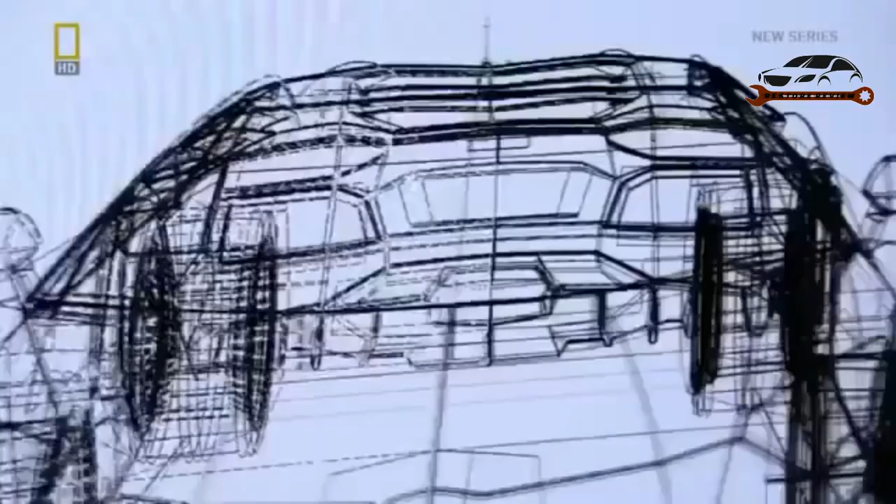Super sports car the world has ever seen. A game-changing vehicle that will alter the scope of supercar design for good. But this will be no simple reworking of Lamborghini's old flagship models. Its engineers and designers are given the task of starting with a completely clean slate.

And at its megafactory in northern Italy, the Lamborghini team has been stretched to its limits to fulfill those expectations. Now, as its latest creation takes to the road, it will be seen if the high-risk strategy has paid off.

Lamborghini has been responsible for some of the world's most iconic sports cars of the past half-century. 350 GT, Miura, Countach, Diablo. The brand has achieved global recognition for its no-holds-barred approach to automotive engineering. Its extreme and powerful machines have placed it among the supercar manufacturing elite for decades.

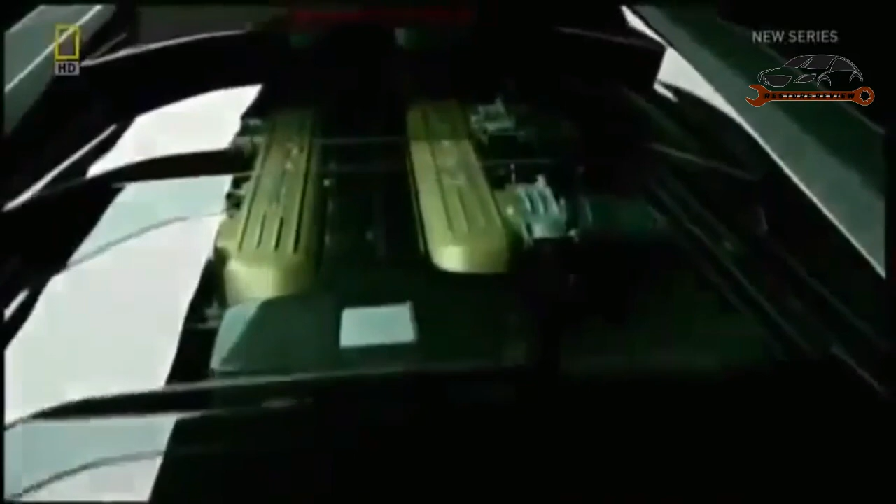But there's no room for complacency in this increasingly crowded marketplace. And a decade since the launch of their last flagship model, the Murcielago, it's time for Lamborghini to flex its muscles once again.

It's up to Stephan Winkelmann, the company's CEO, to come up with a bold approach. One of the toughest things was to give the right briefing, and it took us weeks and months, and once I went home and I was thinking about it, it's so easy, and it's just down to 2 words, so no competitors.

4 years of intense development follow, conducted in fiercely secretive conditions. Our factory was as closed as Fort Knox. We had to prevent anybody from coming in and taking any picture to avoid leakages. But finally, in March 2011, at the Geneva Motor Show, Lamborghini casts off the secrecy and unveils its latest model.

The Aventador LP700-4. Its launch has huge implications for the future of the company. For us, the Aventador was something which has to re-establish the leadership, to be a benchmark for a decade. So it has to be a jump of 2 generations, something really different from what has been there.

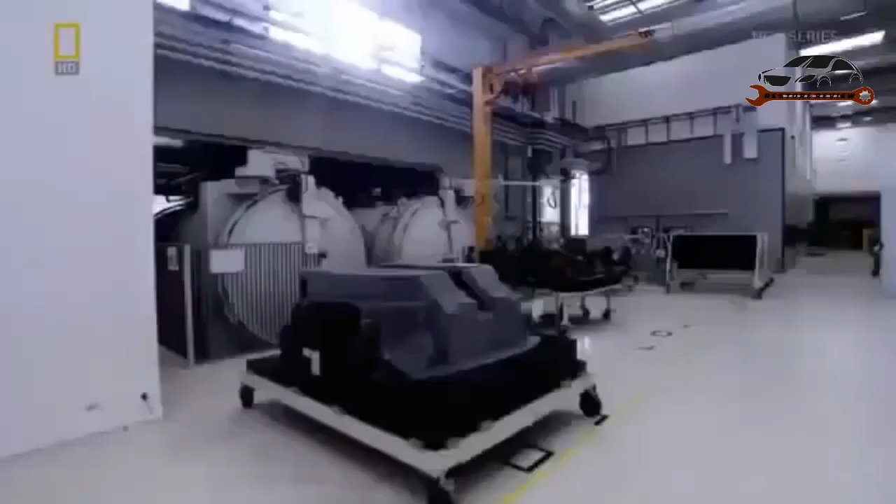Stephan Winkelmann has laid out his vision in a manifesto for the future of the supercar. Nowadays, it's much more important to speak about the power-to-weight ratio, so the balance between the power of the car and the weight of the car. And for us in the future it's much more important to reduce the weight because you get a better feeling, a better driving experience. The Aventador is the first test of this new blueprint.

And the National Geographic Channel has been given unique access at the Lamborghini factory to witness the creation of some of the car's first incarnations. This is Sant'Agata Bolognese, a typically picturesque town in the heart of Italy's Emilia-Romagna district. But it is in fact anything but typical, as it's home to Lamborghini, one of the world's most renowned supercar manufacturers.

The factory is situated in the heart of what is known as Motor Valley in northern Italy. Sant'Agata is intrinsically linked to Lamborghini's success, according to its head of communications, Raffaello Porro. Everybody in the world recognizes our cars come from Sant'Agata Bolognese. And so our factory is a kind of temple where people come, you can say a pilgrimage, to visit where those cars come from.

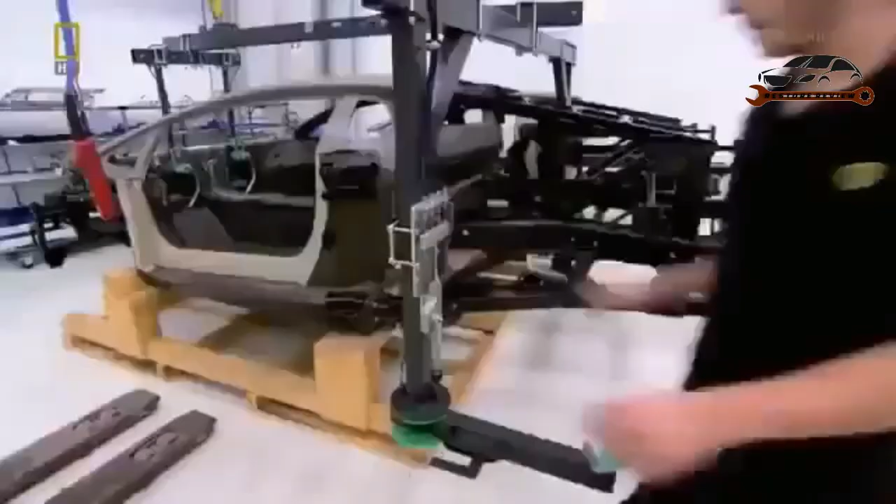The factory has seen many changes over the years, but its purpose has never wavered, to produce vehicles that challenge the status quo. And a largely local workforce is a vital part of that ethos. They're coming from this region, not even from the region, they're coming from this part of Emilia. You know, we are in Emilia-Romagna, it's the Motor Valley, and this is in Emilia.

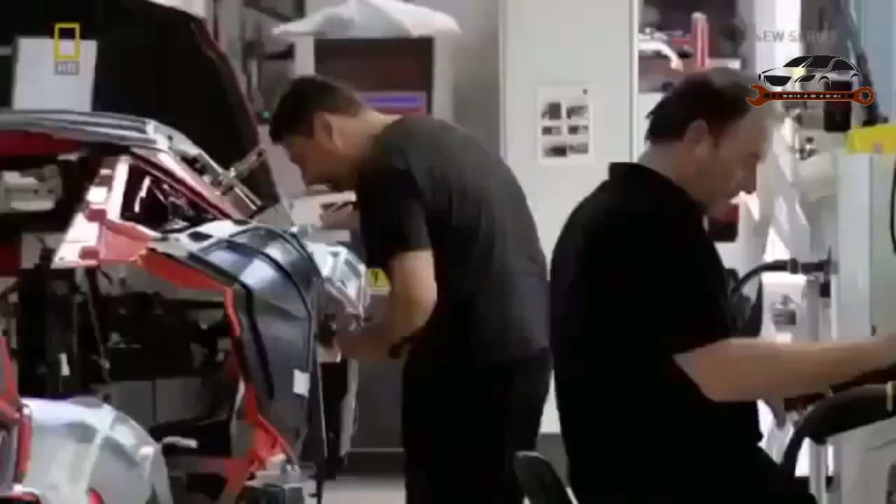So a lot of our people are not only living here, they were born here, they are here since generations, and a lot of workers we have in our factory, in our plant, are here at the second generation. These people are Lamborghini's lifeblood. Over 400 individuals working with a singular aim, to produce high-end vehicles that consistently capture the public's imagination.

In the last couple of decades, a new breed of creative and high-tech vehicle specialists has emerged. Companies such as Pagani and Koenigsegg have set their sights on toppling the most revered names in supercar engineering. Names like Lamborghini. But it's unlikely that this Italian giant will let its mantle fall without putting up a fight. An attitude embodied in the company's emblem, the Raging Bull.

Partly inspired by the bravery of Spain's legendary fighting bulls, one of which showed such fearlessness in battle that it was awarded a trophy for its courage in 1993. Its name was Aventador, and almost 20 years later its legacy lives on in Lamborghini's latest model. It's Aventador's battling spirit that Lamborghini's development team must channel.

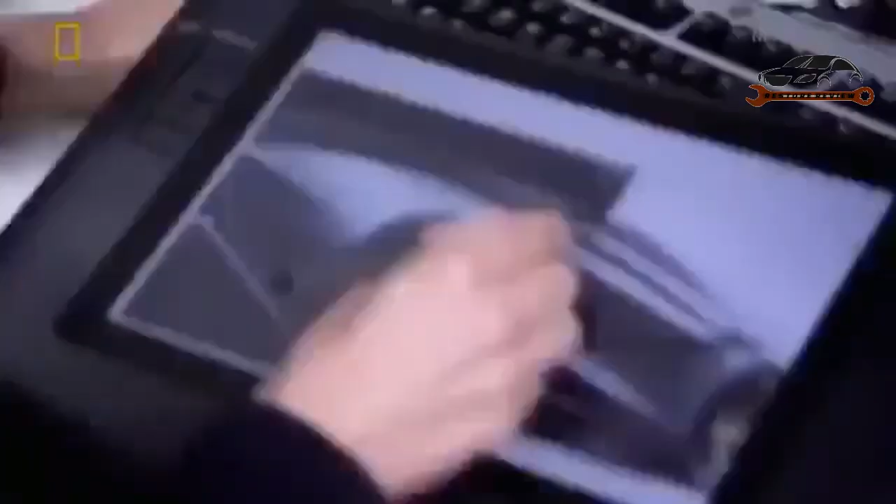In 2007, they're faced with the daunting task of creating a supercar that sets the standard for all others. Maurizio Reggiani, head of research and development, realizes that the only way of doing so is to take a step into the unknown. We had to completely redefine the car, to start from a blank sheet of paper, and on this sheet determine, for each function, all that was needed to ensure that we'd have the best car in the world, to completely redefine what constitutes a super sports car.

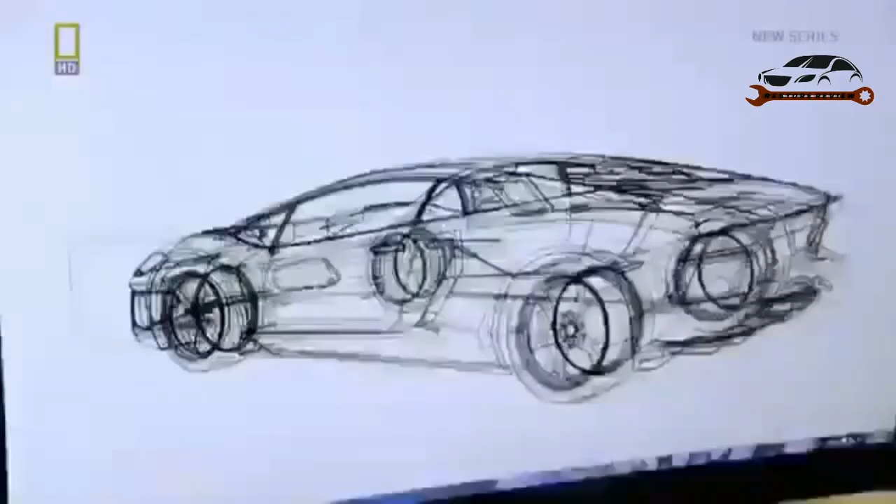To start from a completely clean slate is extremely high risk, and it's up to Reggiani to convince the board that it's the right thing to do. This was one of the hardest things. Why? Because the project we were presenting had nothing in common with the old Murcielago, not with anything that existed in production at all. So it really meant beginning from scratch, with all the risks that come with that.

But the board decides the risk is worth taking. At the end of the day, they understood very well, because this is, again, about what Lamborghini is all about. Now, to recreate and to be always revolutionary in the approach. The spirit of innovation is apparent in every fibre of the Aventador, as Lamborghini know that the fight to stay at the top won't be won through half measures.

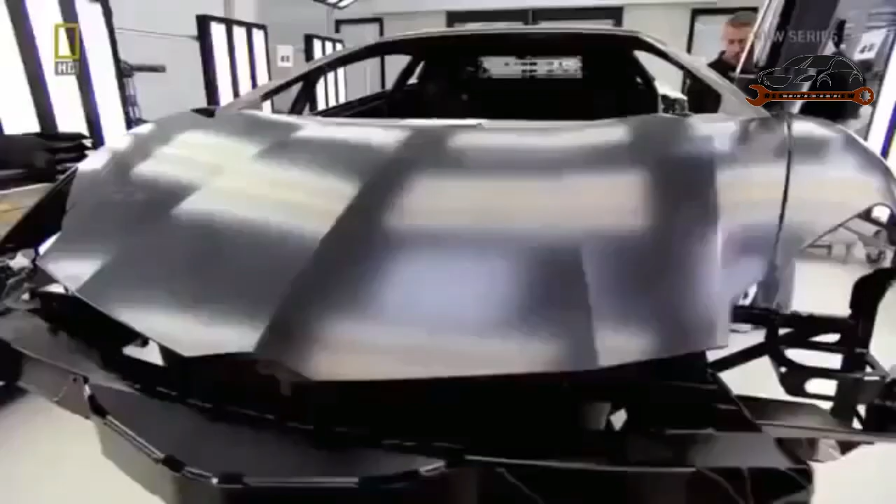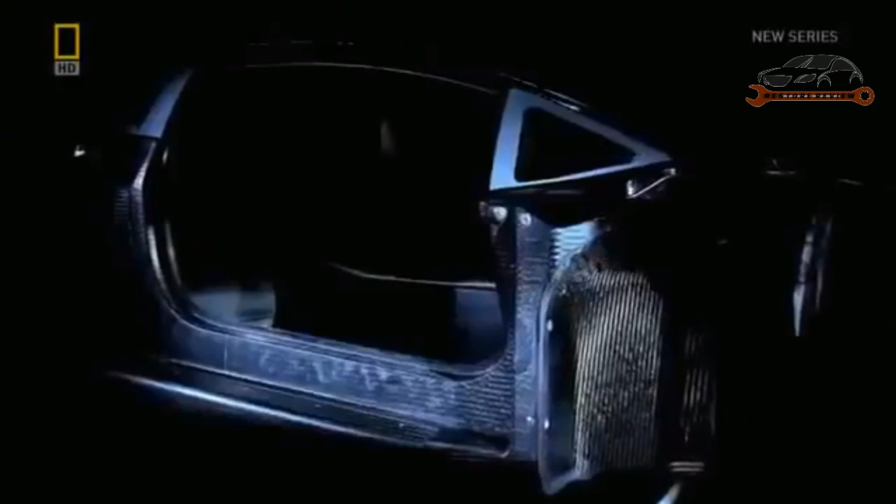And nowhere is that combative approach more apparent than in their focus on lightweight construction, which they've taken to new levels with an entirely new concept for road cars. A full carbon fibre monocoque. These structures are common in racing cars, but the high cost of materials and laborious production methods have made them unavailable to supercar manufacturers, who've had to combine carbon fibre with cheaper, heavier elements, such as aluminium. That is, until now.

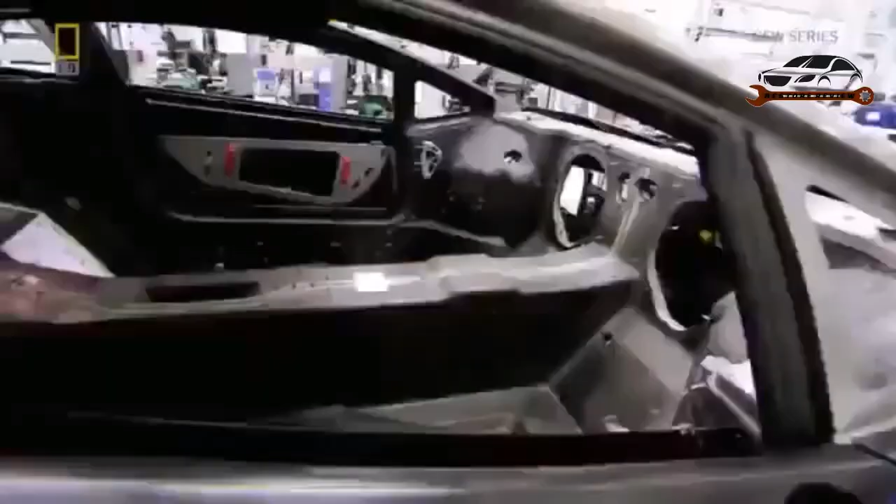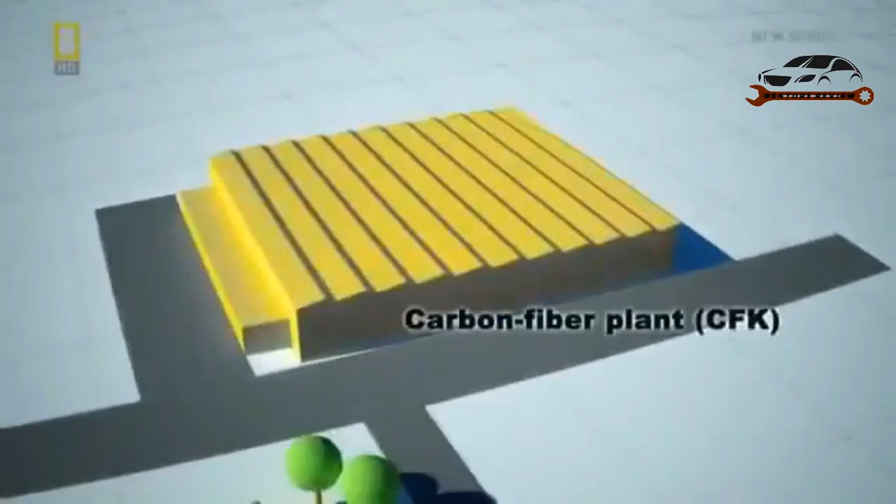The development team has devised a method that allows this race car technology to be mass-produced. But it requires a specialist facility that's up to the task. So in 2009 they build a whole new megafactory just down the road from the company headquarters, devoted to constructing the Aventador's unique carbon fiber body. Which, being just 147.5 kilograms, helps make the Aventador significantly lighter than the Murcielago, considerably improving the all-important power-to-weight ratio, and in turn, the handling.

Lamborghini hopes that this innovation will stave off the threat by the new wave of rival companies. Lamborghini knows well what it's like to be the cocky young upstart, vying to unsettle the established names, as that's how it began almost 50 years ago. The man upsetting the status quo back then was the company's founder, Ferruccio Lamborghini. He had made a fortune from a tractor manufacturing business and used some of his money to satisfy his love of sports cars.

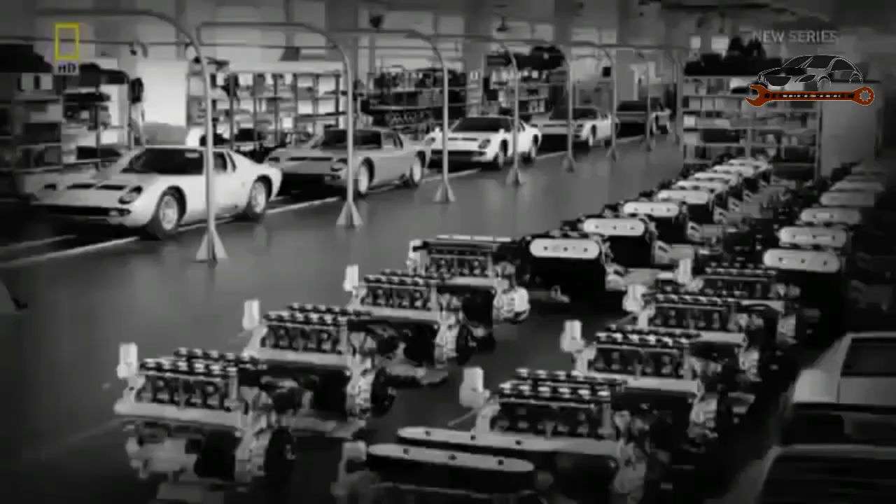According to Lamborghini legend, when he went to Ferrari to critique some of their parts, his views were dismissed. He got a negative response out of some requests he had and proposals to make a better car. And so he said, I will found my own company and I will create the best super sports cars ever. He established Automobili Lamborghini in 1963, and for the next few years he toiled furiously to achieve his goal. The cars he created were well received, but it wasn't until the launch of the iconic Miura in 1966 that Lamborghini really made its mark. The tractor maker had succeeded in breaking into the exclusive world of supercars with his bold new enterprise.

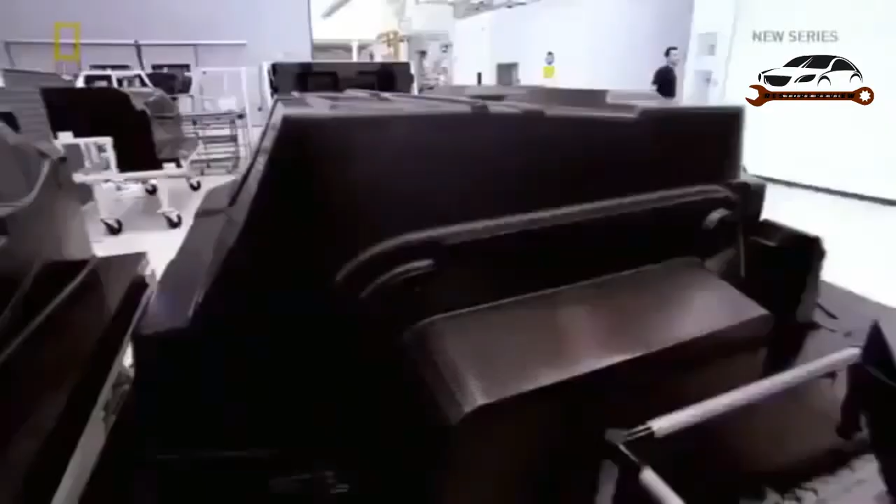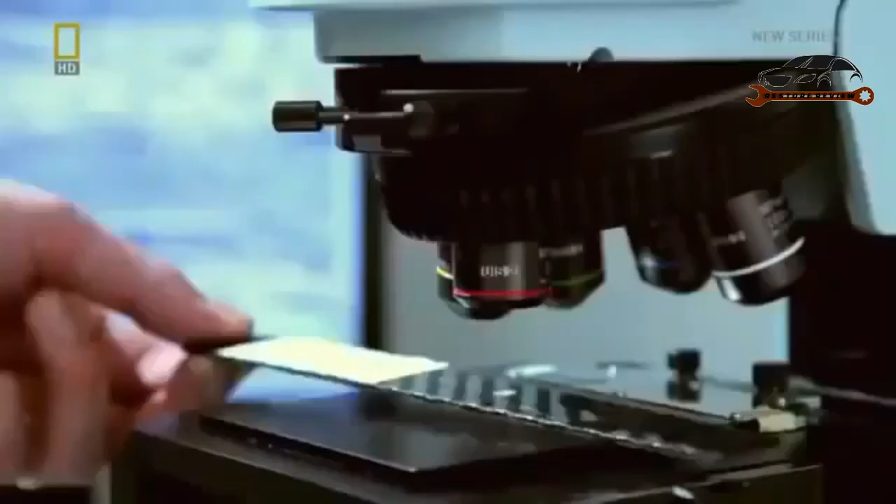Almost 50 years later, despite having joined the ranks of well-established sports car manufacturers, the company still strives to be edgy and uncompromising. As demonstrated by its approach to the area it believes will define the future of sports car engineering: lightweight carbon fiber construction. The company's relationship with carbon fiber goes back as early as the 1980s, when it created the Countach Evoluzione, a concept car which experimented with the use of composite materials. It was dreamt up by the newly formed Composites department, whose successor has made many inroads into research and development of lightweight composite materials.

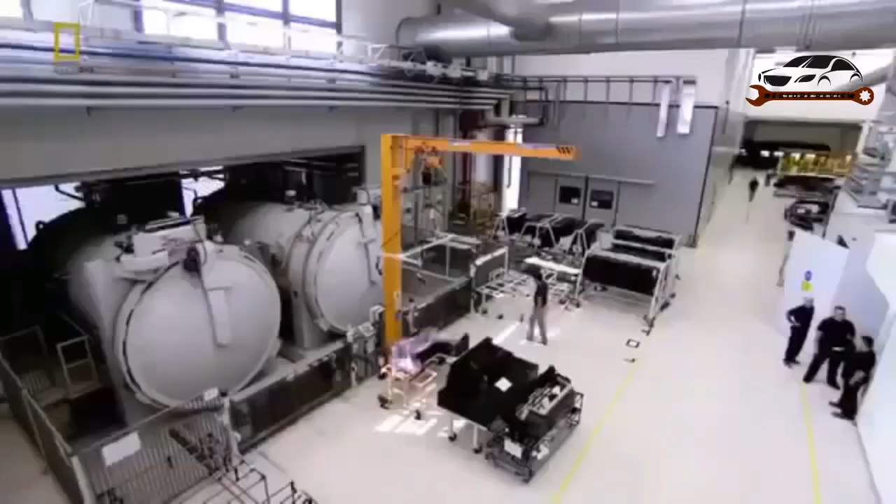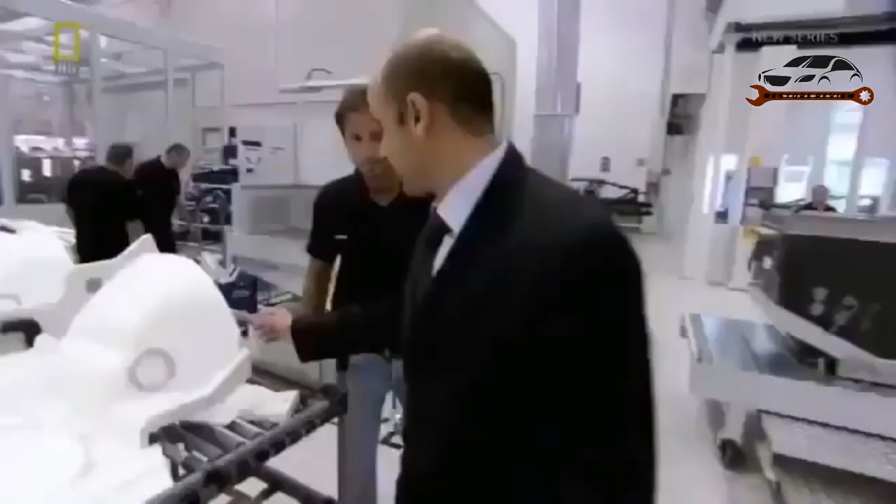And discoveries made here mean that next door, the company has been able to construct its new carbon fiber production facility. The man given this task in 2009 is Ranieri Niccoli, Industrial Director. And he must devise it completely from scratch. So, when we designed and built this factory, we didn't have any automotive benchmark. We were the only one in the automotive business to build and to run this kind of technology. So they have to look elsewhere for inspiration. So we looked to other sectors, for example the aeronautics sector, then we adapted and modified their process to a Lamborghini production system in order to build our car.

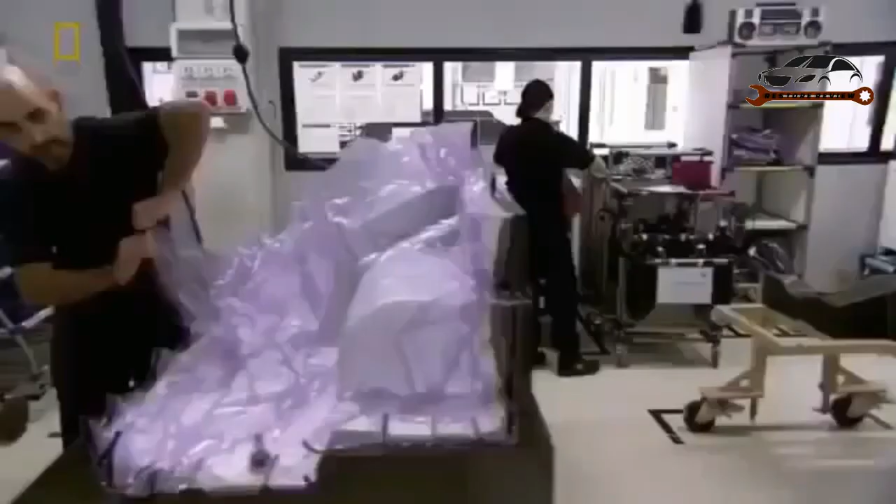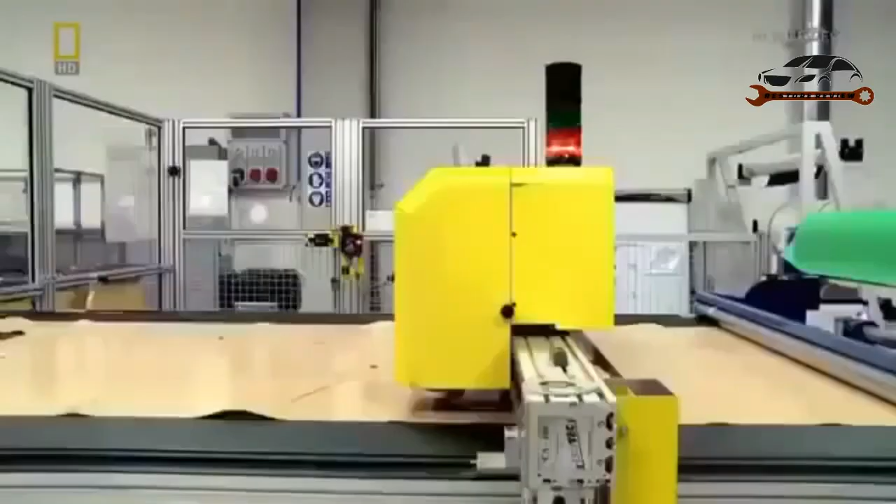The result is 500 square meters of new production space, known as the CFK, devoted entirely to sculpting the Aventador's super lightweight monocoque. Here, 146 carbon fiber specialists toil day and night to create 4 complete monocoques every 24 hours. To achieve this target, engineers have developed a unique production system. All materials are first cut by an automated machine before being sent for preparation. The material is placed into molds, and laminated in a vacuum bagging process which forces the layers into shape, before being cured in a large pressurized oven known as an autoclave.

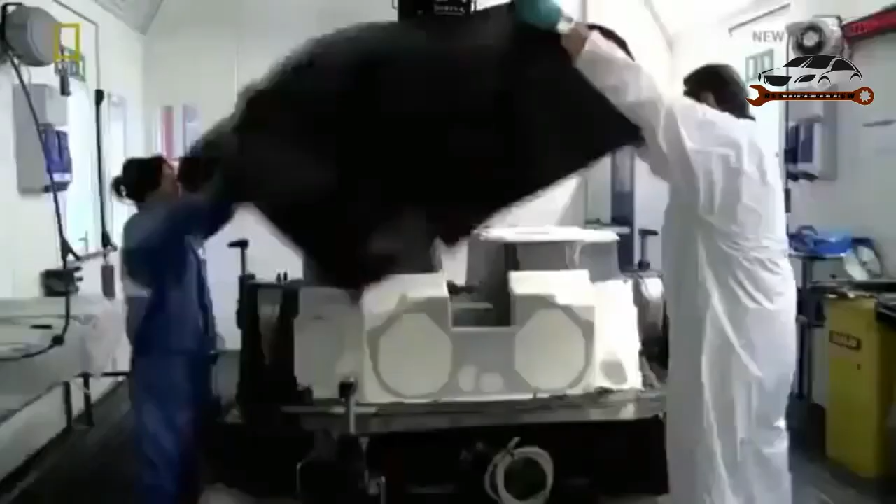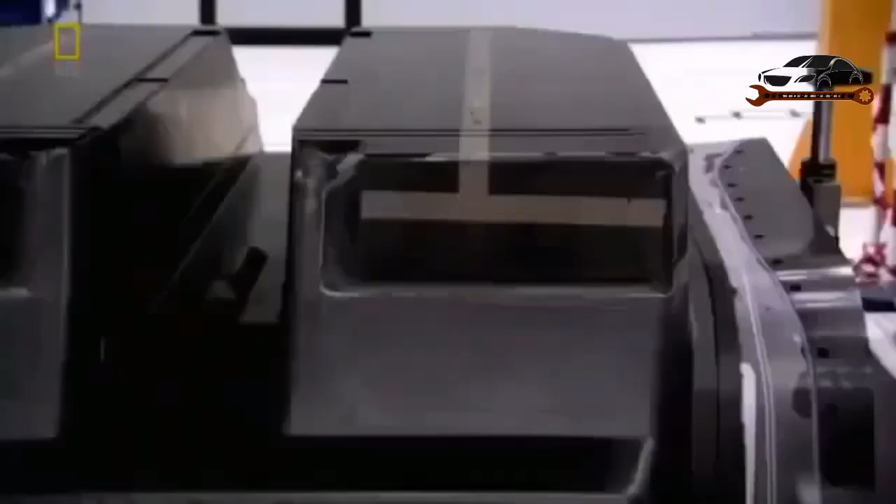Meanwhile, the production of other parts of the monocoque is underway, as operators fine-tune and cut more layers of carbon fibre with the assistance of precision lasers. A special oven is used to inject resin into the carbon fibre mats, which transforms them from soft sheets of cloth-like material to a strong, rigid structure. After all these processes are over, the two key sections are finally recognisable: the base section, known as the tub, and the roof.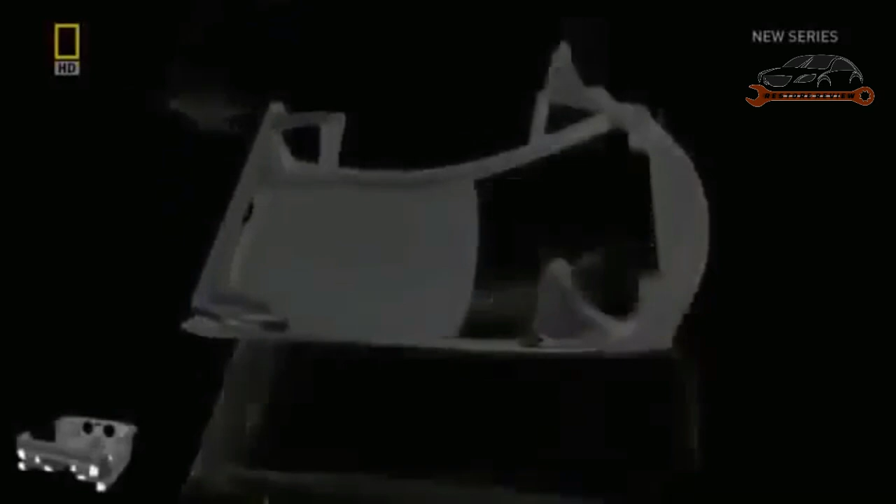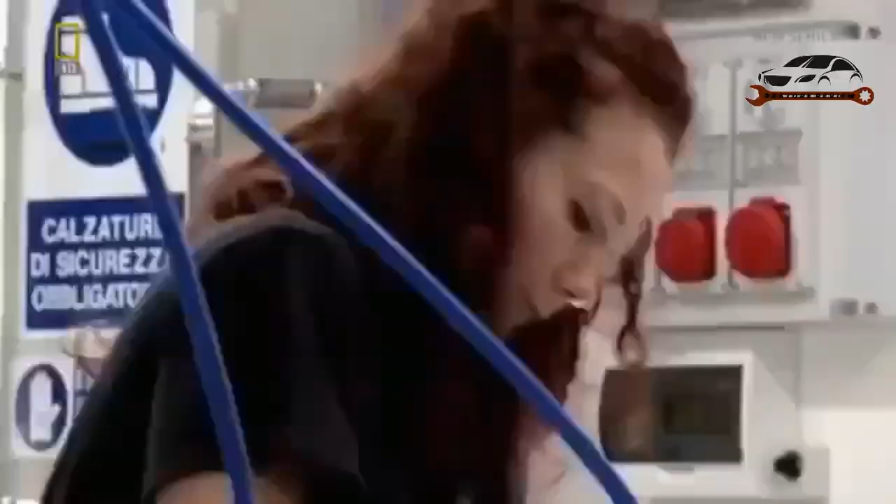They're placed in an automated machine, which drills them with holes allowing for attachments to be made later. Throughout the factory, computer-controlled machines share tasks with human specialists, a partnership that's integral to the Lamborghini production process. The main priority of our plant was to follow the Lamborghini production system. So, a high degree of craftsmanship, high degree of skill, people, combined with technology, with automation processes. This was the main challenge that you can also see in our plant.

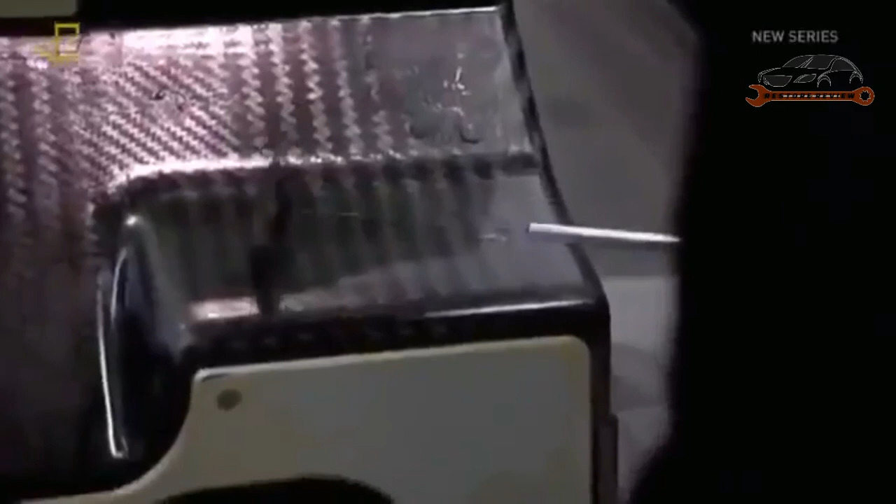Aeronautic-inspired engineering is ingrained in many aspects of the Lamborghini CFK production process, such as this stage, known as the Harmony Hammer Test. In this quality control test, an operator strikes the monocoque section with a specially designed hammer and allows it to vibrate, listening out for areas where air might be trapped in the carbon fibre shell.

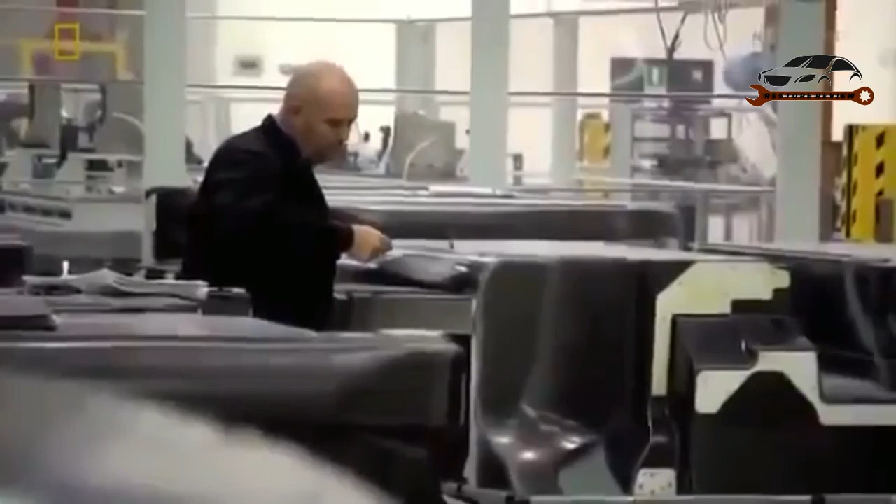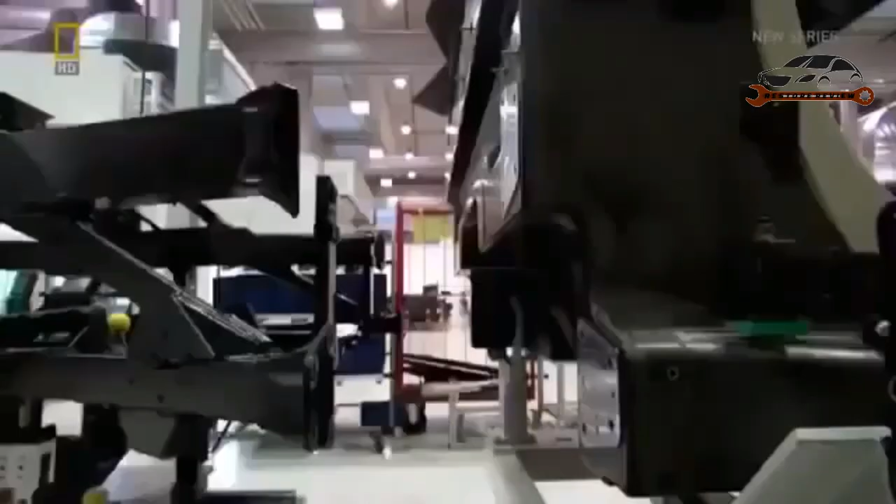Once checked, the parts are ready for their union, as the tub and roof are glued together, turning the monocoque into a single entity. It's essential that the two parts of the monocoque are exactly aligned, so workers use a robotic arm with a 3D laser attachment to check that the sections have been coupled correctly. Once the correct dimensions are confirmed, metal sections are manually attached to the monocoque and the body is complete.

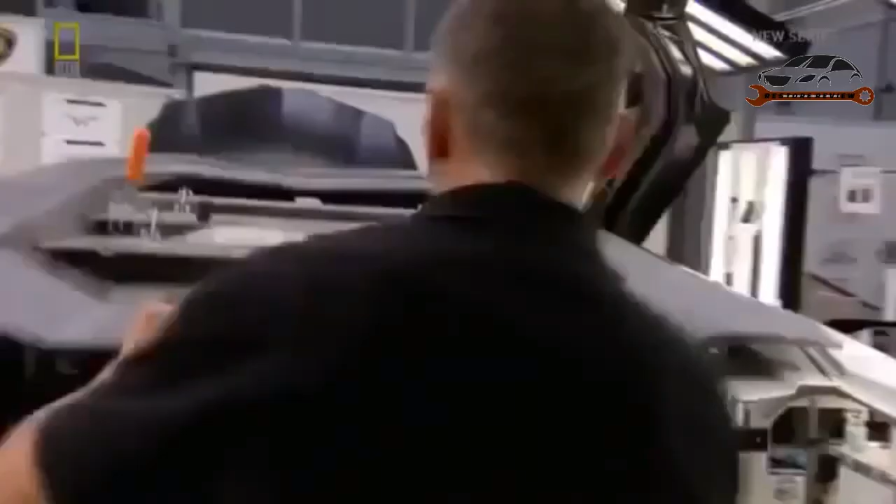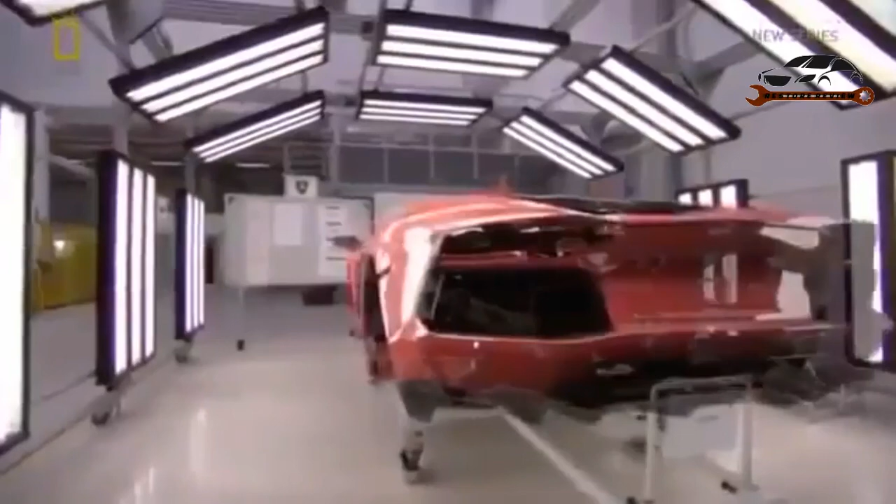Then it's into a light tunnel where surfaces are quality checked to ensure they're in pristine condition before the Aventador's body is signed off for release. As the body is ready to leave the carbon fibre plant, it's possible for the first time to see the Aventador's unique geometry taking shape. This extreme design is one of the most recognisable aspects of the Lamborghini DNA. And it's a tradition maintained and pushed forward here, at Lamborghini's Design Centre, or Centro Stile.

The generational leap required of the Aventador does not stop with its engineering capabilities. The look of the car is integral to its ambition. The design of Lamborghini always has to be revolutionary. You have to understand, if you see a car in front of you, this can only be a Lamborghini, even if you don't know the model. So it's about creating something new, but recognizable at the same time.

The job of the design team and its chief, Filippo Perini, is made even tougher during the earliest phase of the Aventador's development, when the board forces them to compete with outside companies to earn the right to design the new model. And at one point, victory comes close to slipping through their fingers.

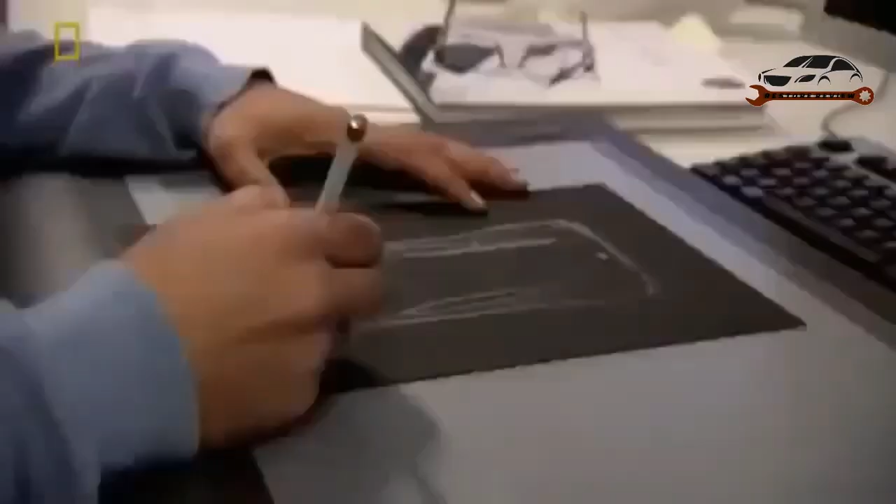The toughest moment was when, during the process, we realized that we were at risk of losing the project altogether. This was a critical point in the process when we realized that we had to be more innovative, more unconventional, more extreme, unexpected, and uncompromised. It's tough going, but the competitive spirit has a positive effect on the team, and their proposal wins the day. What results is a design imbued with a deep understanding of the company's past.

Our design is driven by the history that we have. It's translated into the desire to always do something innovative, to create a different object interpreted in the most futuristic way possible. This is part of the Lamborghini history.

Certain design elements are considered vital parts of the Lamborghini flagship DNA, such as the famous scissor doors. But beyond that, the design team have free rein to create something completely new. They have a sharp eye for aesthetics, but they also need a comprehensive understanding of the car's engineering needs. For style choices can only be made if they contribute to the car's high-level performance.

Form always follows function, so there is nothing which is fake. Every air intake, every flap, everything is for real. So it's not pimped up, and this is tough, because at the same time you have to do something which is very emotional. One engineering hurdle for the design team is the need to provide the Aventador with sufficient air to cool its V12 engine.

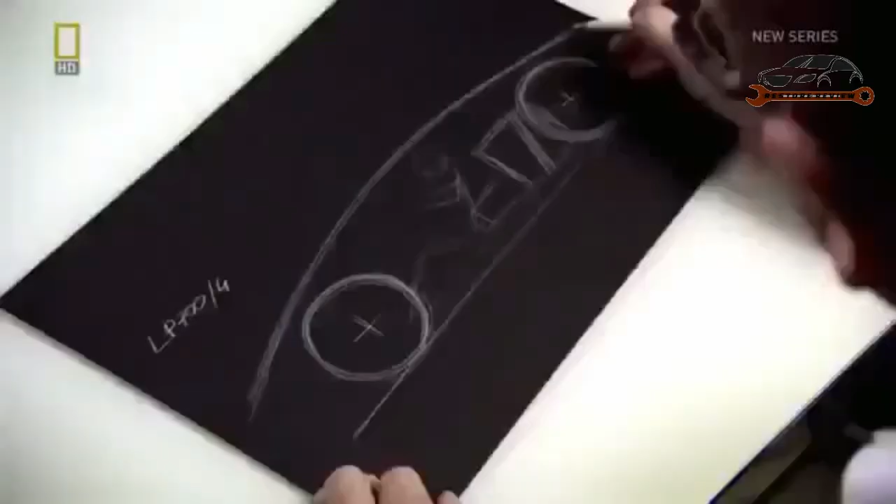What emerges from this balance is a car whose style is intimately linked with its role as a high-performance vehicle. And its sources of inspiration are many, drawn from one of the team's most important tools, the brainstorming board. So we take it from nature, sport, technology, lifestyle, elements that we can integrate, and in that way, brainstorming gives us many design options.

Details like the ignition button and TFT screen seem to come direct from a jet fighter cockpit. And the world of aeronautics influences a lot of other style choices besides. We think that aeronautics, airplanes, fighter planes, but even transport planes are the nearest expression to true beauty and the most advanced design that you can have from an artistic point of view, and also of functionality.

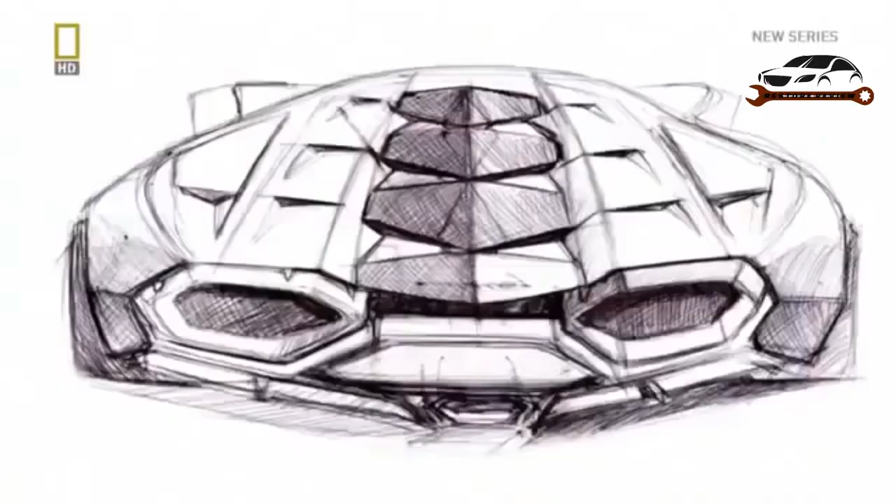We understood that we had to draw inspiration from other worlds, and nothing was better than nature as a reference point. So we took some images of insects that were great inspiration for the roof of the vehicle, with this shape. It's very linear, very sculpted.

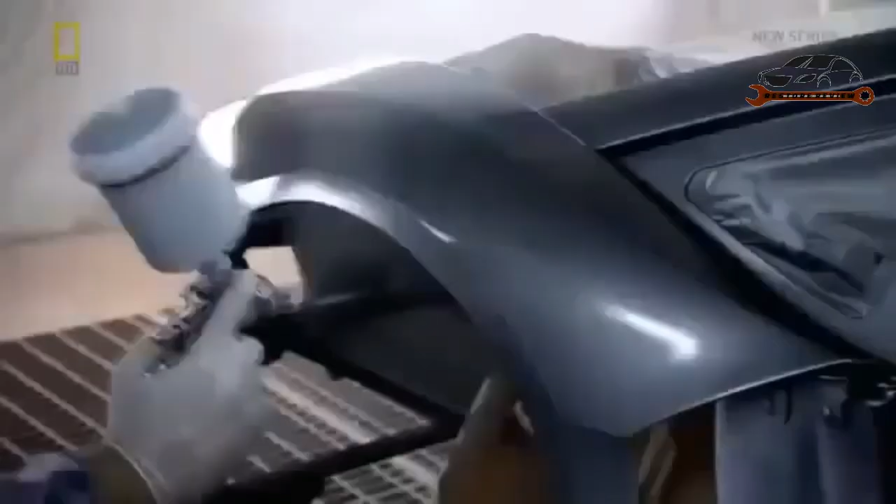Before Perini's vision can be realized, however, the Aventador's body still has some way to go. After the CFK, it's taken away to be given one of its most important characteristics: its color. Here at the paint shop, it's lavished with the kind of attention that most cars could only dream of. One of 13 colors is hand-sprayed over every part of the bodywork. 27 pieces are given individual attention by a specialist, who covers them with 8 litres of paint.

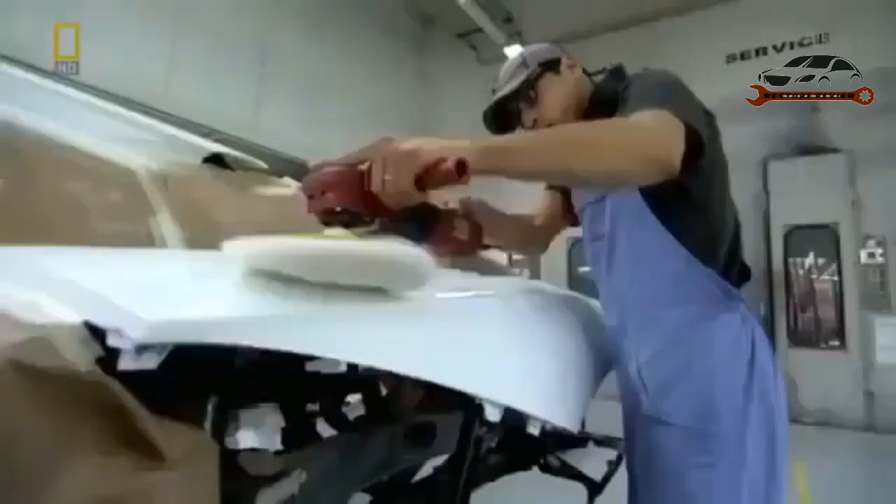The Aventador, with its extreme lines, requires more man-hours than any other Lamborghini in the past. And of course, every phase is carried out manually, as only human analysis and dexterity can ensure that each surface is covered with exactly the right amount of paint. In total, 200 man-hours are spent on every single Aventador while at the paint shop. 3 whole days are spent on polishing alone. After being carefully sanded, the Aventador is repeatedly buffed with special materials.

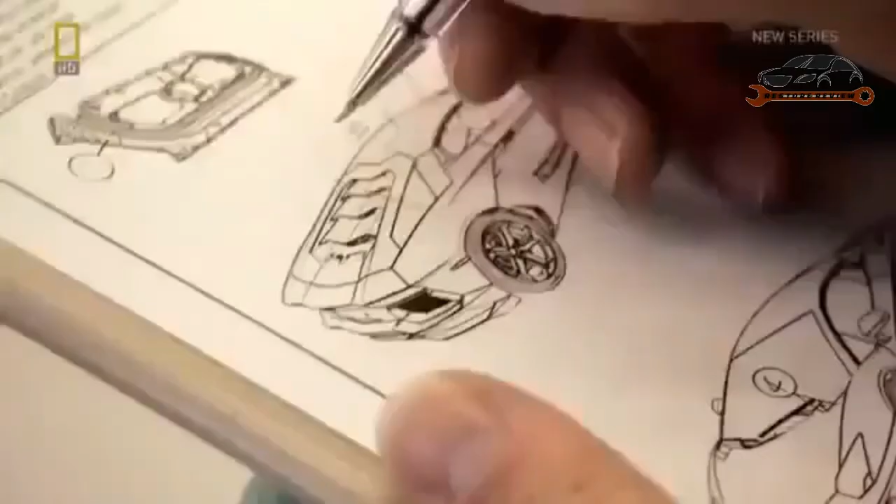After that, it's sent for another quality check in a light tunnel. For 2 hours, an inspector walks around the bodywork, checking for colour perfection. If there's any inconsistency, the offending section will be sent back to be repainted. Underpolished areas are also marked out for extra attention. These hundreds of hours of devotion end when the exacting standards of the inspector are met, and the car is released for the next phase of production, the assembly line.

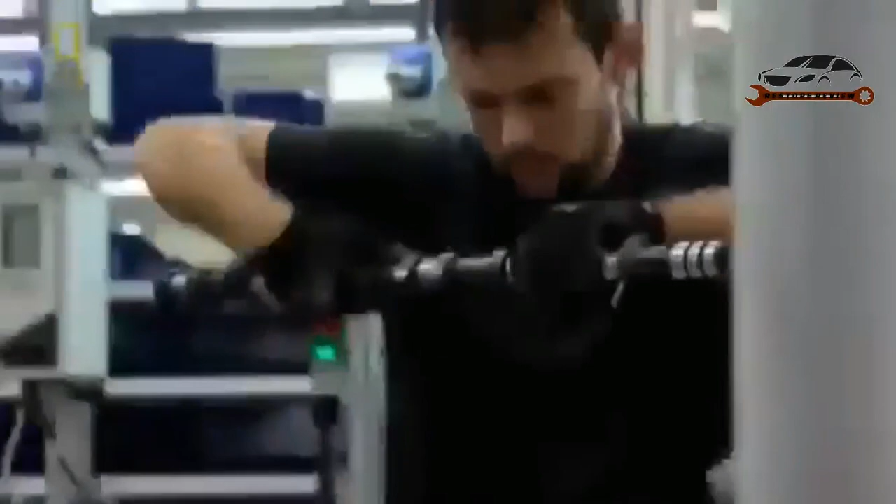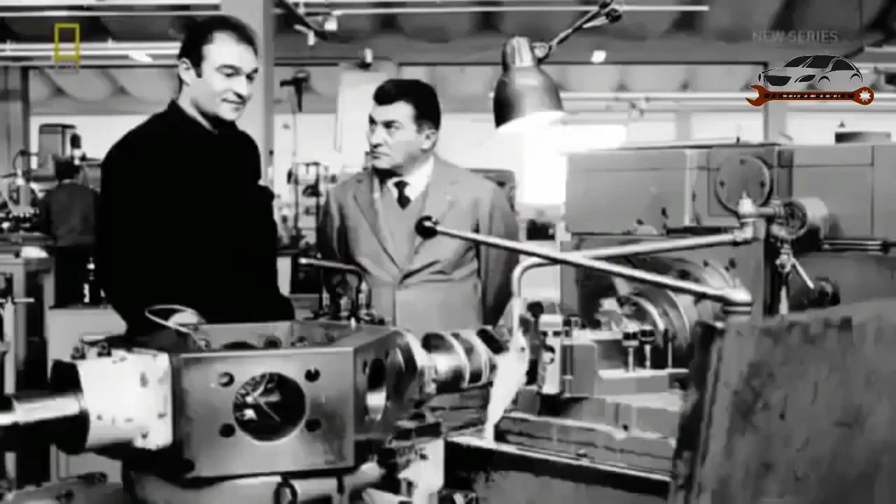The assembly line for the Aventador lies just meters from the original site of the Lamborghini factory, built almost half a century ago. Back then, its founder, Ferruccio Lamborghini, was known for his hands-on approach, frequently seen on the factory floor, directing operations. He focused on the skill of the mechanic as being key to the success of the product, and that attitude still permeates the site today.

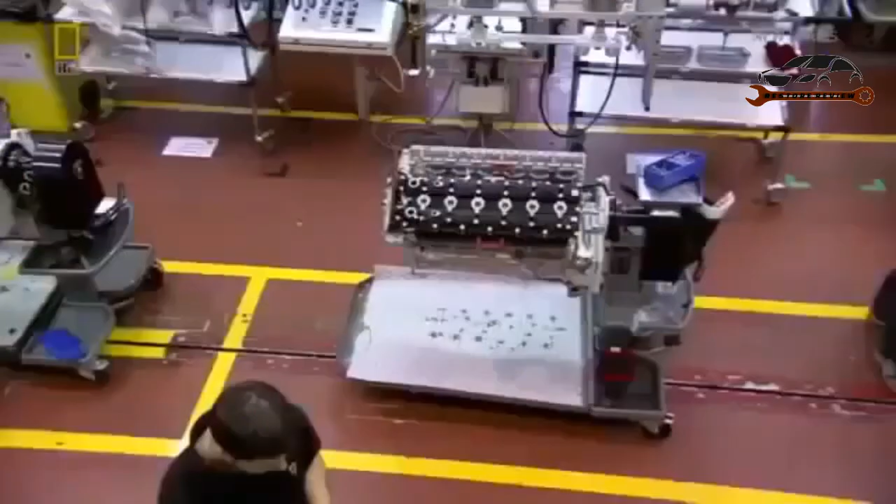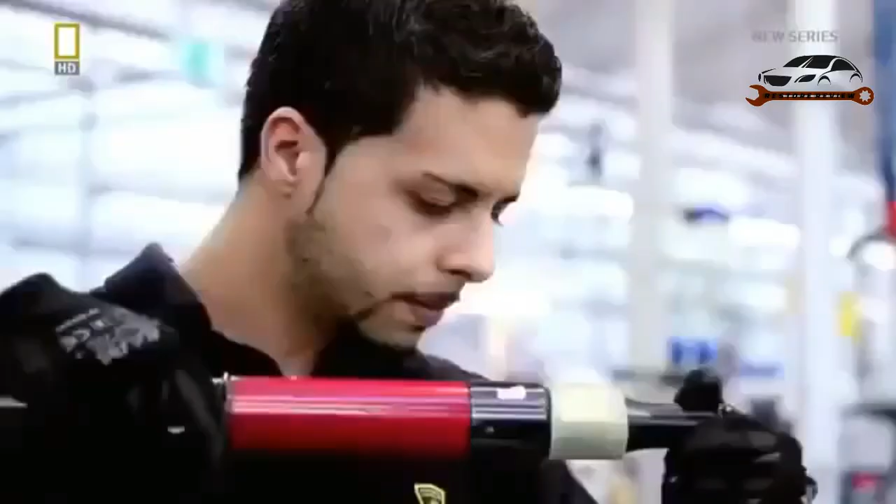Here, 50 workers spread over 11 workstations are responsible for the task of assembling Lamborghini's latest model. The man in charge of making sure things run smoothly is production manager Andrea Costantini. He sees his highly trained workforce as a direct link with the roots of the company.

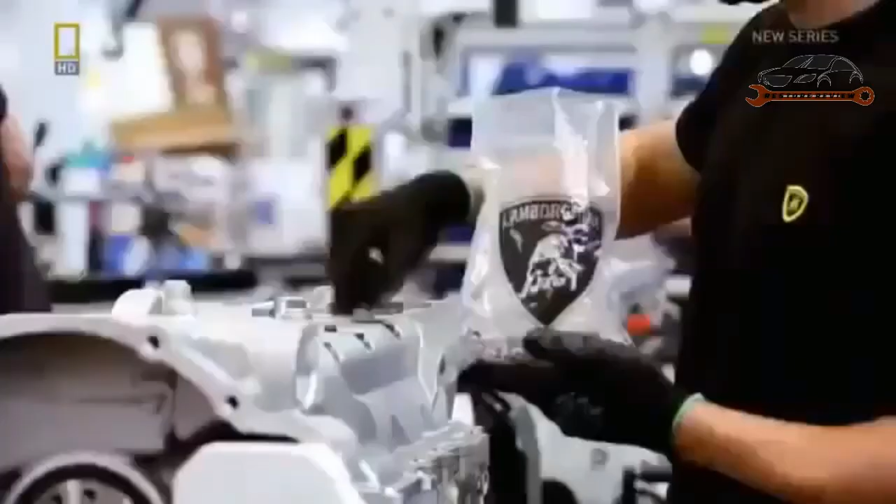In this case, the workers are the most trained. We take these guys directly from the best schools of mechanics of Emilia-Romagna here, the surroundings of Lamborghini, and we train them for more than 2 years to allow them to be really the best experts on mechanics and engines. So everything is done manually, still like we did since 1963, since when Mr. Ferruccio Lamborghini, the owner of Lamborghini, started.

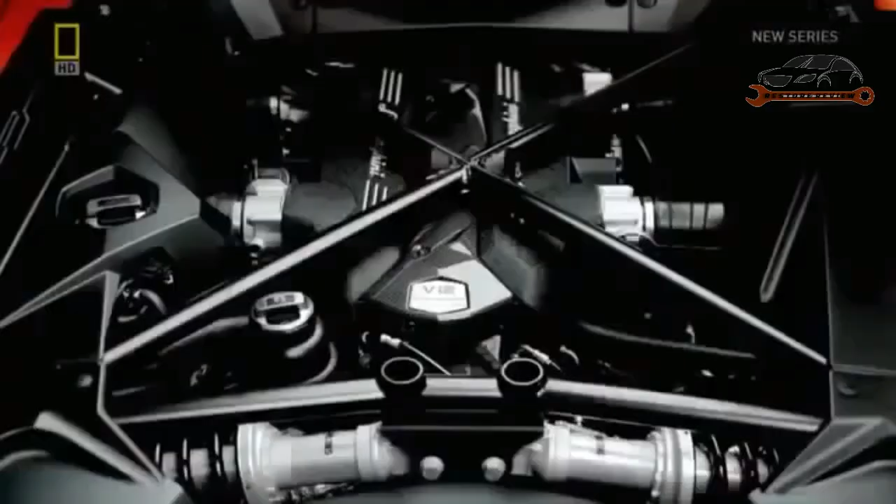In an age when machines dominate production in almost every field of manufacturing, loyalty to the art of skilled manual labor is not often seen. But here it's believed that when it comes to reliability and precision, humans still have the edge over machines. And nowhere more so than in the engine assembly station. For this is where the heart of the Aventador is put together. The Lamborghini V12.

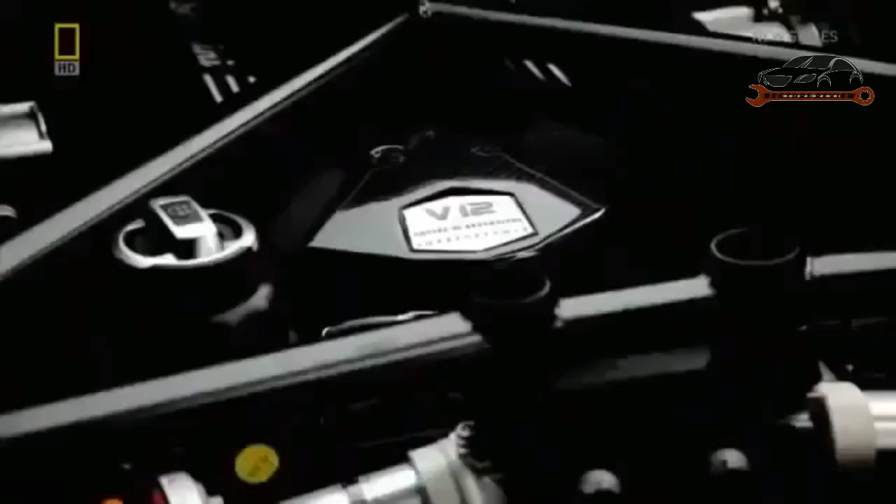At a time when many sports car manufacturers are shying away from using the 12-cylinder engine, Lamborghini is resolute. The V12 always has and always will provide the power for their flagship models. The V12 for Lamborghini is part of our DNA. Everything for us is rooted in our history, which started with the 12-cylinder engine.

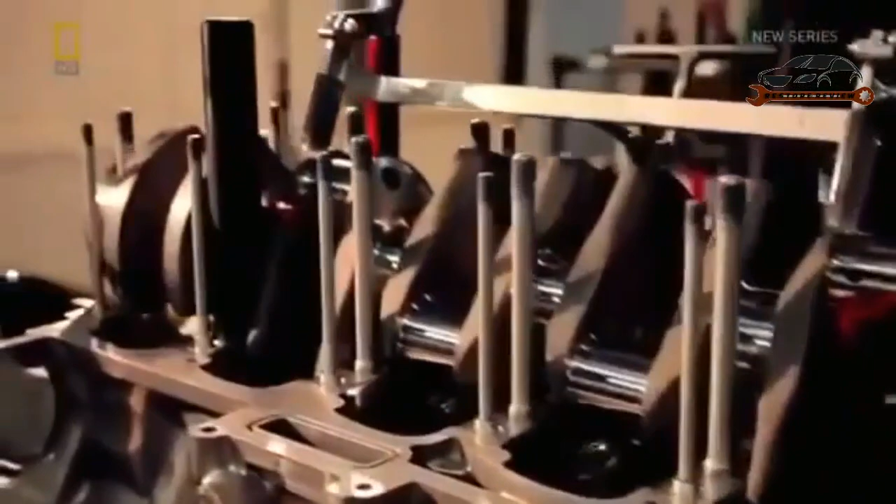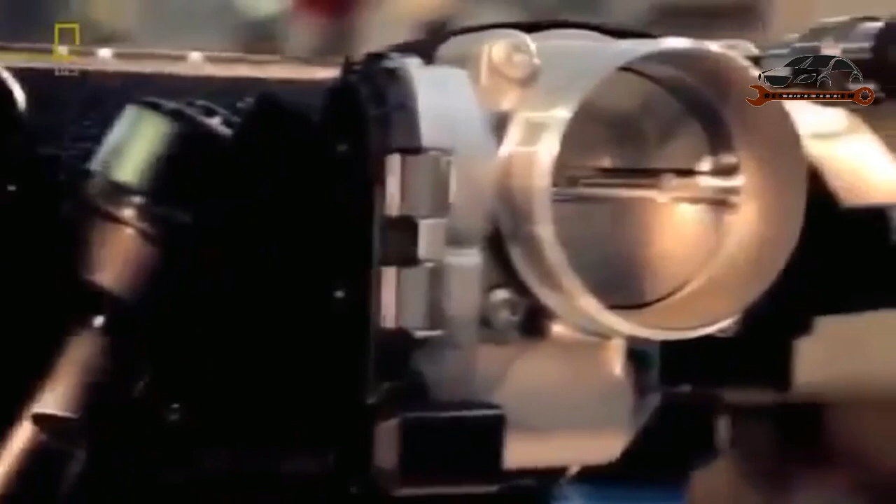With 6.5 litres of displacement and 700 horsepower, the Aventador's V12 is about as gutsy as it gets. But as with everything else, it's had to move with the times. Lightweight, again, is the order of the day. And despite the fact that this engine is more powerful than the Murcielago's, it weighs less, just 235 kilograms, by using aluminium silicon alloy on components such as the crankcase.

The main purpose of the V12 is to power the Aventador, but when linked with the car's exhaust system, it takes on another significant role. Creator of the mighty Lamborghini Orchestra. The V12 motor represents what for us is the sound, the music of the car, the way in which it's presented to the public, the way she makes herself heard and announces her arrival.

To achieve this, we invest a great deal of time in simulations. We simulate the sounds that we can have, and then we experiment first in the lab and then on the vehicle itself. This 12-cylinder symphony has a full range, from a moderate rumble through the town at low revs to the screaming crescendo of maxed out gear shifts.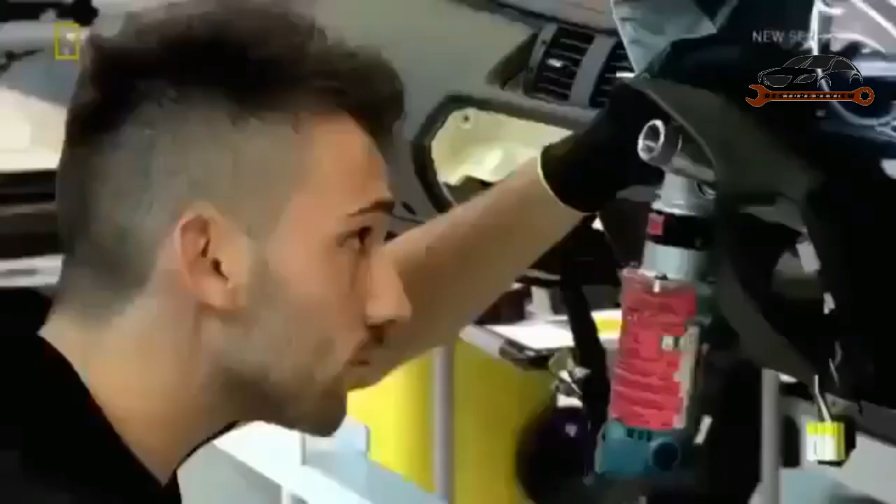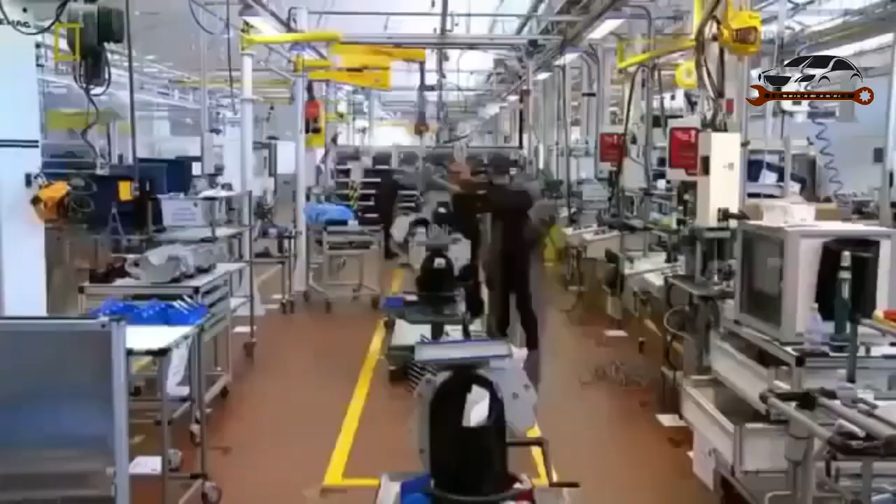The company's output of luxury vehicles is a mere fraction of what the large-scale manufacturers produce for the mass market, with around 800 Aventadors due to be created in the first year. But that doesn't mean the factory can't be run to similarly exacting standards of efficiency as the largest groups. And that means that workers have just 1 hour and 40 minutes to carry out a whole range of highly meticulous tasks. If they take too long, the whole assembly line will stall, targets will be missed, and costs will mount up.

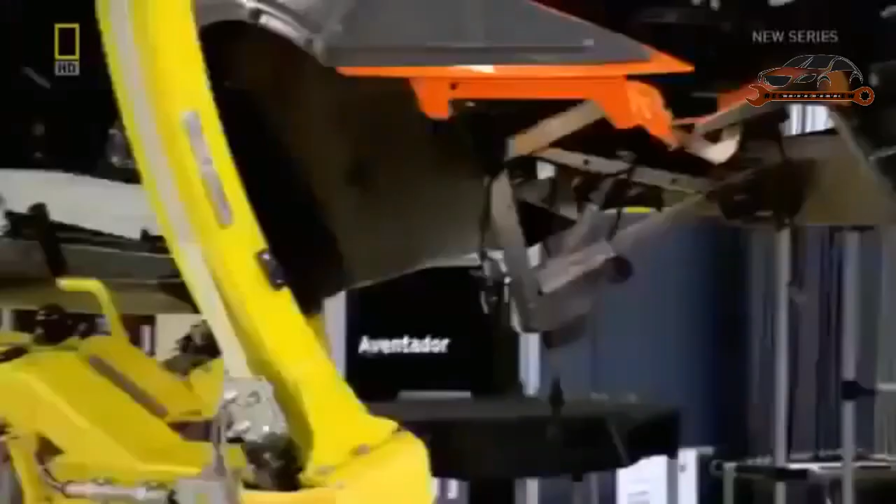The countdown starts here at the first station. Work is carried out on the underbody and front differential by lifting and rotating the vehicle to give the mechanics easy access, before being readied for what is arguably the most significant stage in the Aventador's production, the insertion of the colossal V12 powertrain into the car's chassis.

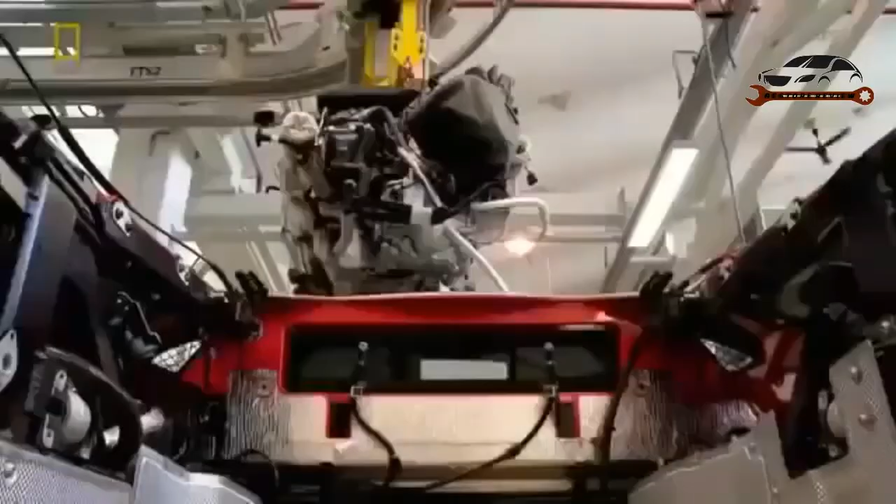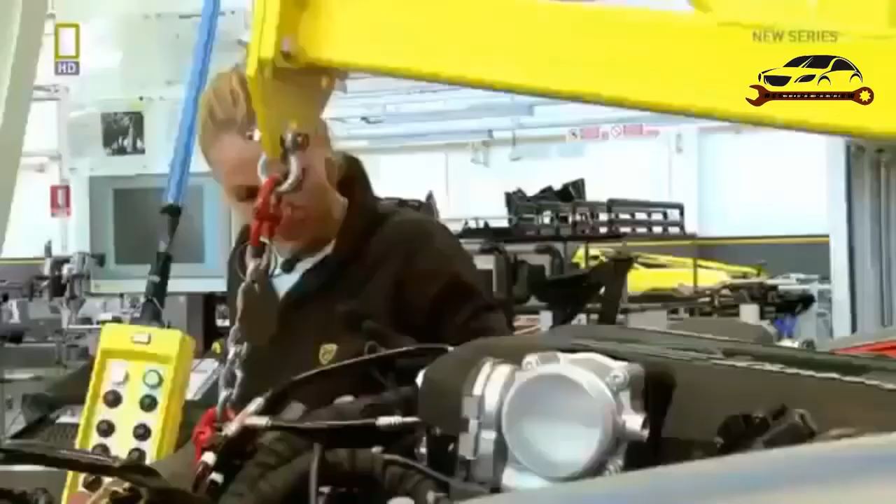Here we are in the most critical assembly station of the Aventador assembly line. Here we have the assembly of the engine, the heart of the car, basically inside the body in white. We call it the marriage between the car and engine. This marriage of elements is when the development team's work of the past 4 years comes together, where design and engineering combine.

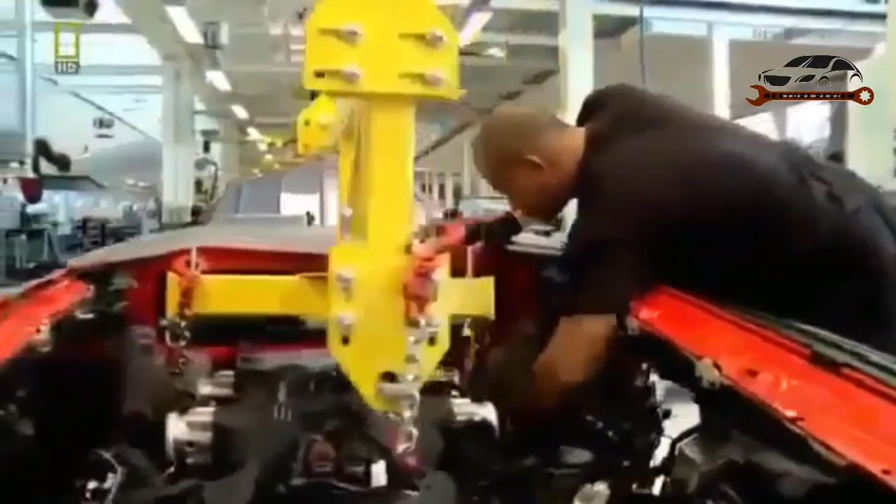Here, as with all other phases of production, the specialists of each station take full responsibility for their section. You can see the workers check each and every single connection to be sure that each and every phase was done in a good way. The risk in this case is the car is not working properly afterward during the road test, and could be a big problem for a customer. As you can see, this is absolutely not done with equipment, robots or other automatics, but is done manually.

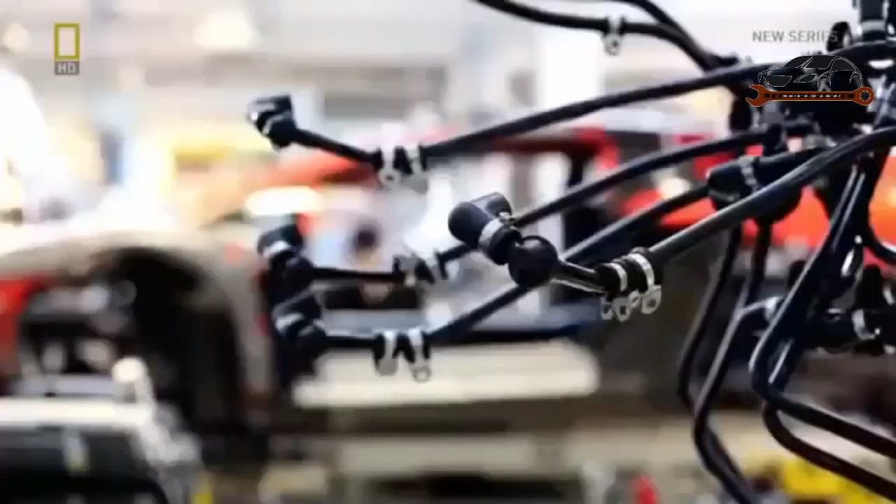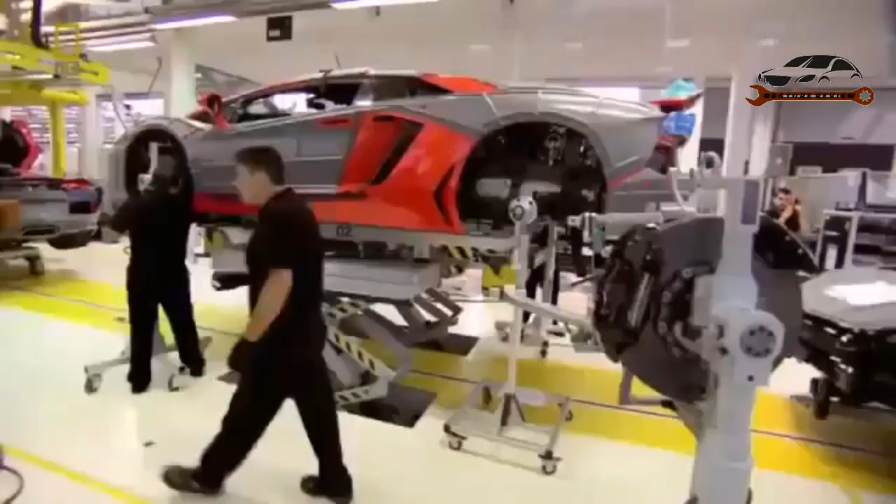Step by step, the car is taking shape, being molded from empty shell into the fully formed supercar that will leave the factory. And while the assembly line is in full flow, next door, the second critical aspect of the Aventador is being prepared: the interior. It's in this sector of the factory that a customer's individual preferences for the way their car looks can really be indulged.

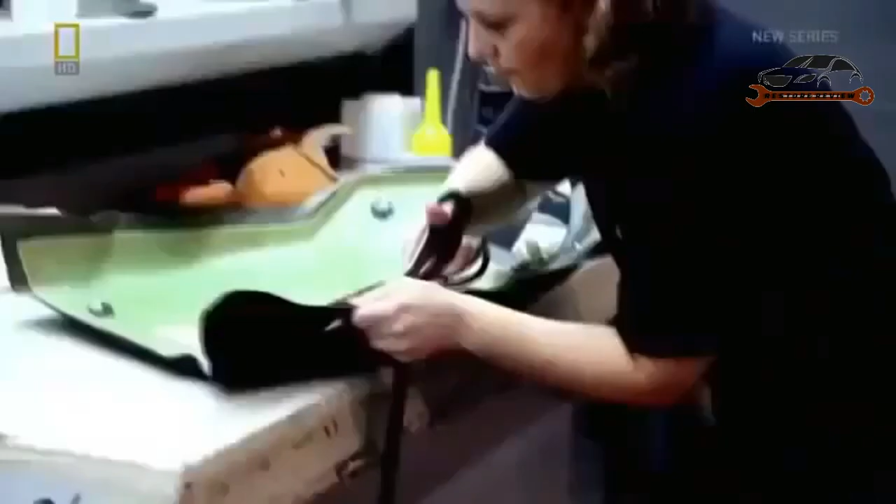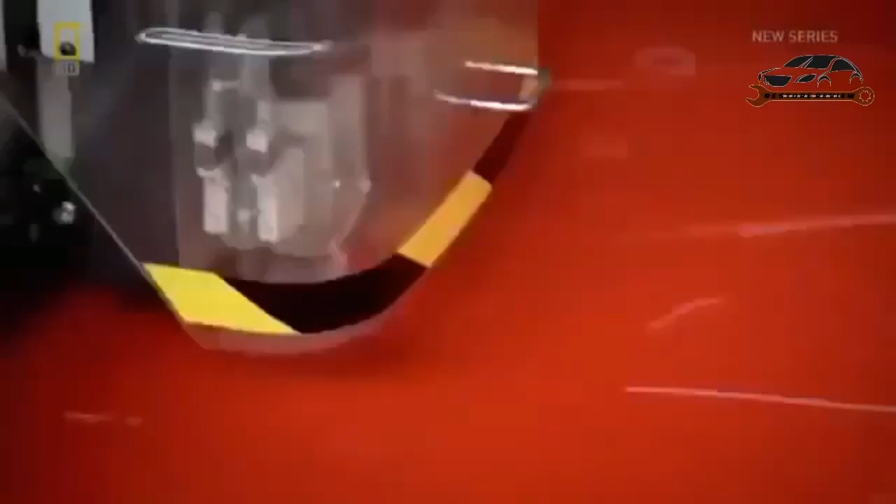About 100 square meters of leather hide in 9 different colors arrives each day. Attention to detail is essential to pass the stringent quality control checks. Here, a leather specialist looks for minor imperfections in the hides and marks them up wherever found. An automated machine recognizes the marks and cuts around imperfections, leaving only pristine material for the Aventador's interior. The leather is then taken to specialists with 3 years training to be stitched and glued onto the various parts that make up the Aventador's interior.

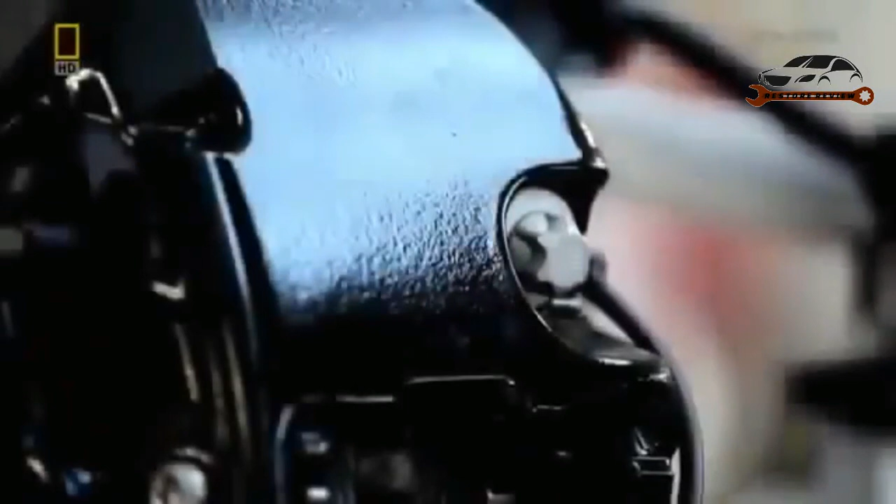Back on the assembly line, one of the Aventador's most important pieces of kit is ready. This simple-looking item is the suspension, but its apparent simplicity belies the creativity that goes into its engineering. The Aventador uses a pushrod suspension system direct from the world of Formula One race cars. It works by keeping wheel control and damper elements separate.

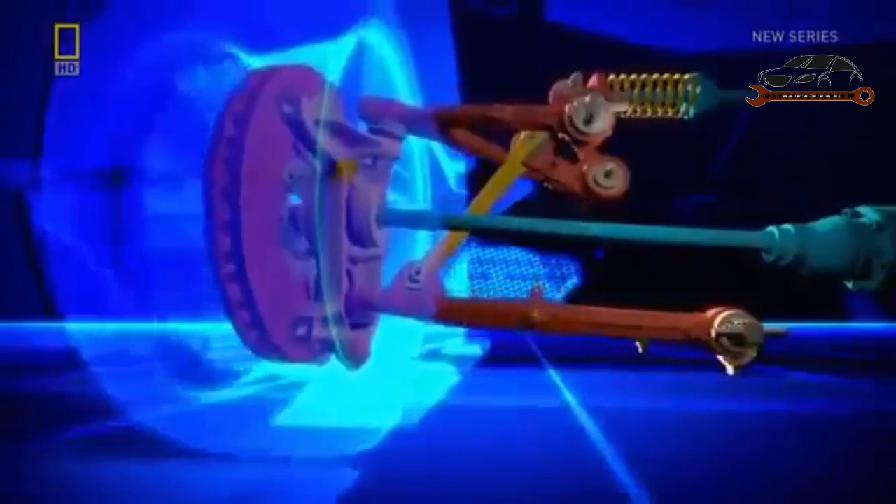By keeping the damper elements inboard, the pushrod system allows the wheels to maintain maximum contact with the road when going round bends, massively improving the handling on corners, a must for a car that can hit speeds of up to 350 km/h.